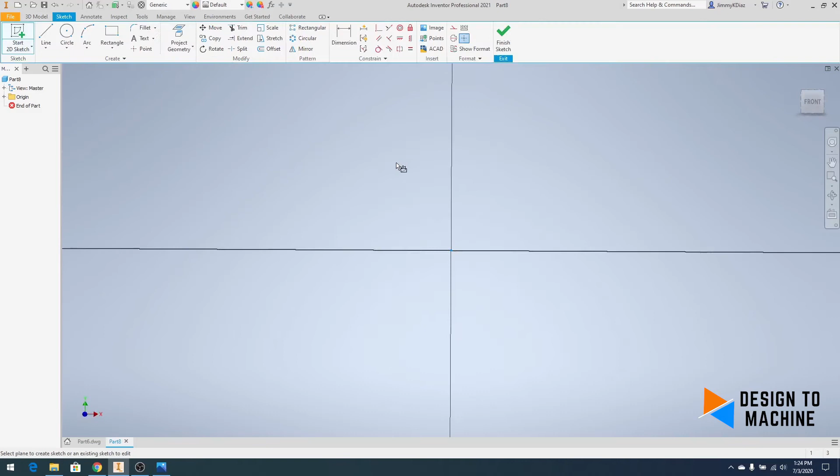Let's go ahead and start a new folder or a new window, and it's going to be metric. We're going to go ahead and get started on a 2D sketch on the XY plane, on the front view. Start with the rectangle, and it's going to be 85 millimeter. Hit your tab on your keyboard, by 62.

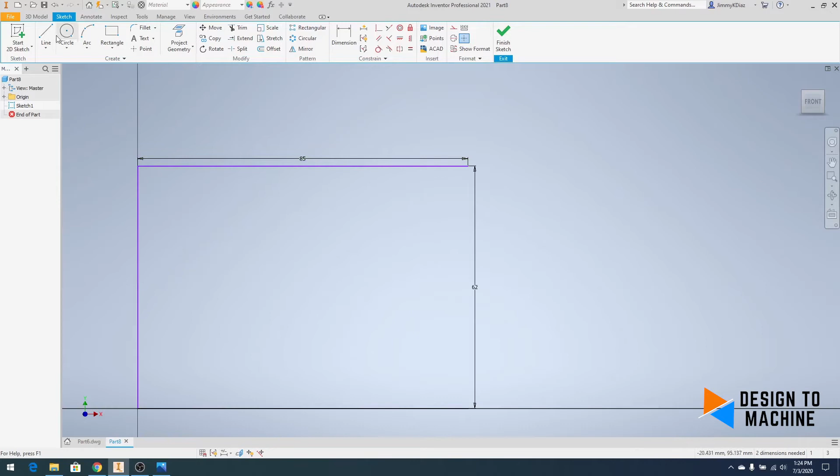Right click OK. Go ahead and delete the back line, and we're going to sketch the back part of it. It's going to be 12 millimeter down, 7 millimeter to the left, 38 millimeter straight down, back over 7, and then down to 12.

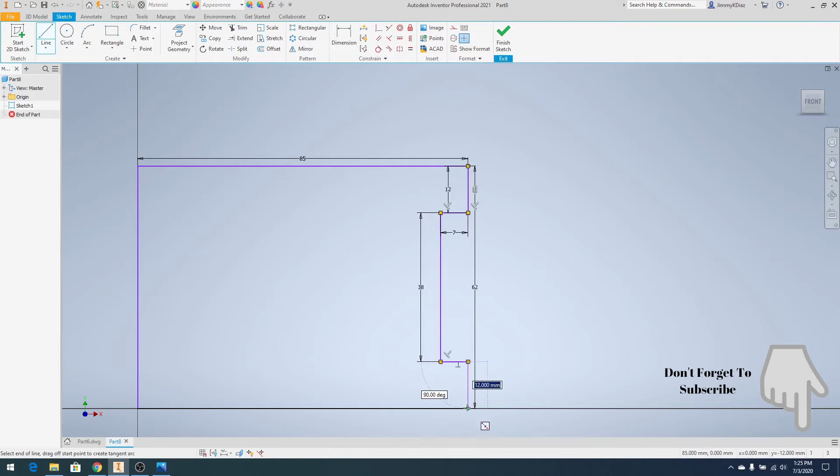We'll go ahead and create another rectangle inside this one, and it's going to be 66 millimeter. Hit your tab key, by 57. Right click OK. Let's position this, it's going to be 2.5 millimeter. Right click OK.

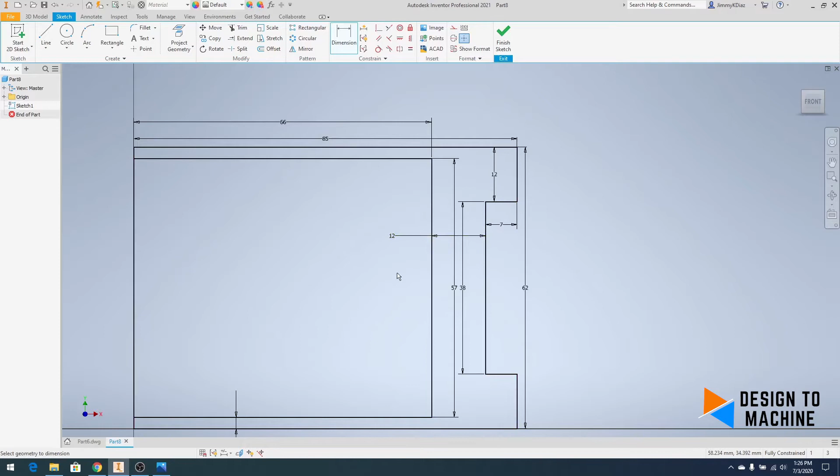Let's make sure that this is 12. Perfect. Finish sketch. We're going to extrude this face in both directions.

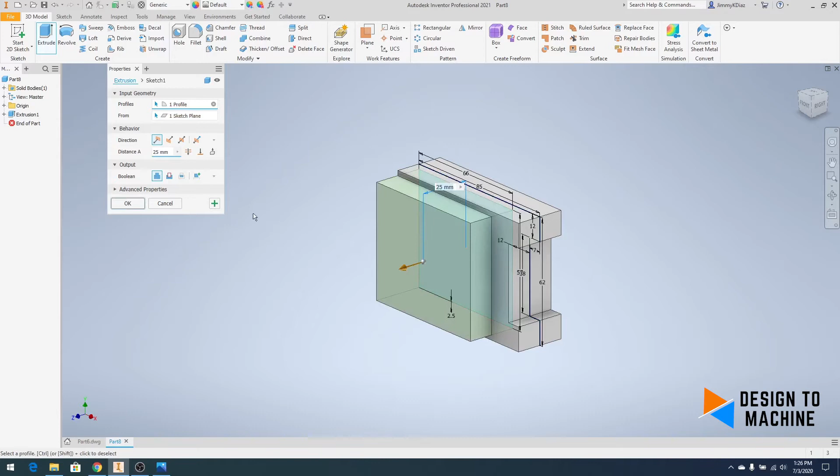It's going to be 25 millimeter. Hit your plus to apply and create new extrusion. We're going to extrude the center portion in both directions. It's going to be 15 millimeter, and you can hit enter.

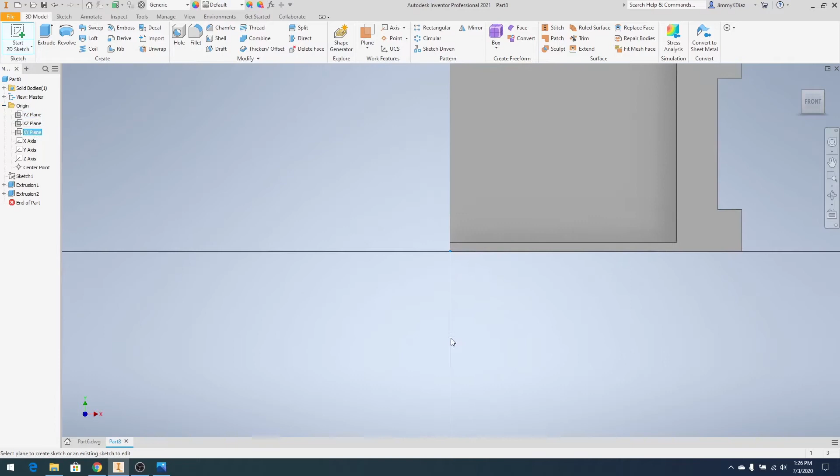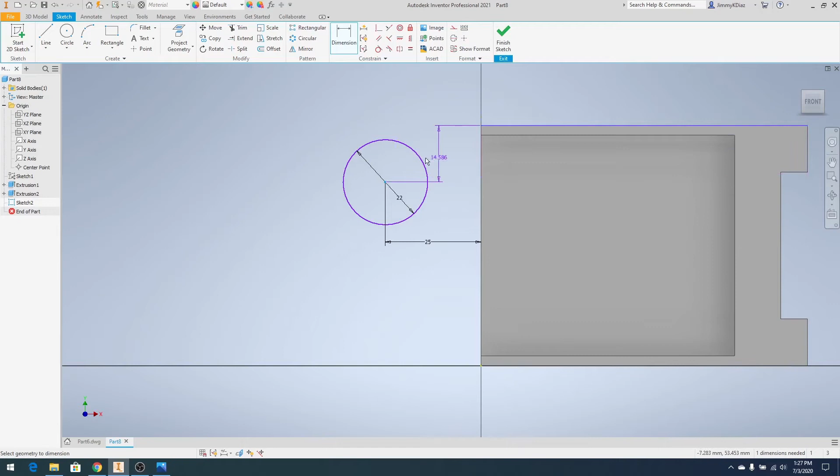So we're going to create another sketch on the XY plane, the origin, XY plane. We're going to start off with a circle that is 22 millimeter. Let's go ahead and position this here to here, 25 millimeter. And from here to here, it's going to be 22 millimeter. Right click OK. Create another circle, it's going to be 44 millimeter. Right click OK.

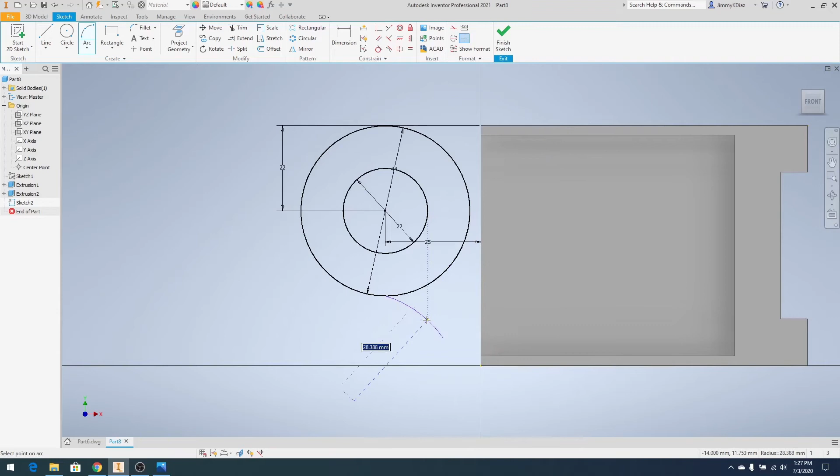Now let's go ahead and do some arcs. The bottom, somewhere right around this area, it's going to be 18 millimeter arc. And then there's going to be another one right here that's going to be a 9 millimeter arc.

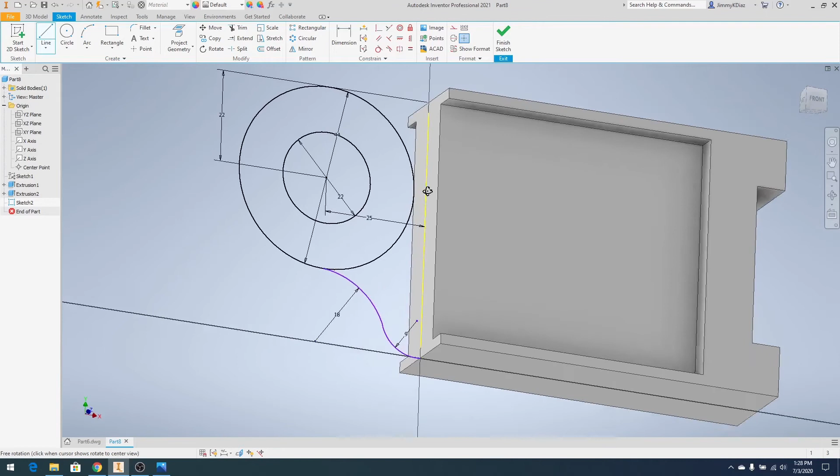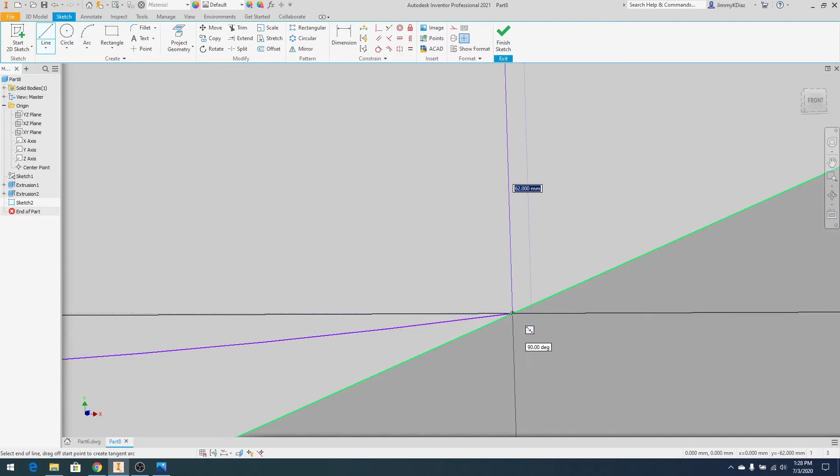Right click OK. Create a line so we can extrude this feature from here to here. And also we're going to go straight down to close the loop. Just like that. Right click OK.

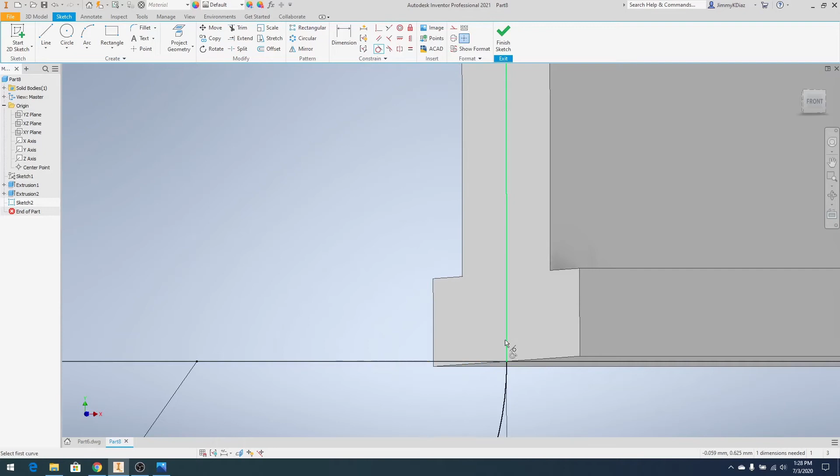So let's go ahead and constrain these arcs, make sure that they're tangent to one another. Well, go back one. Okay, tangent from here.

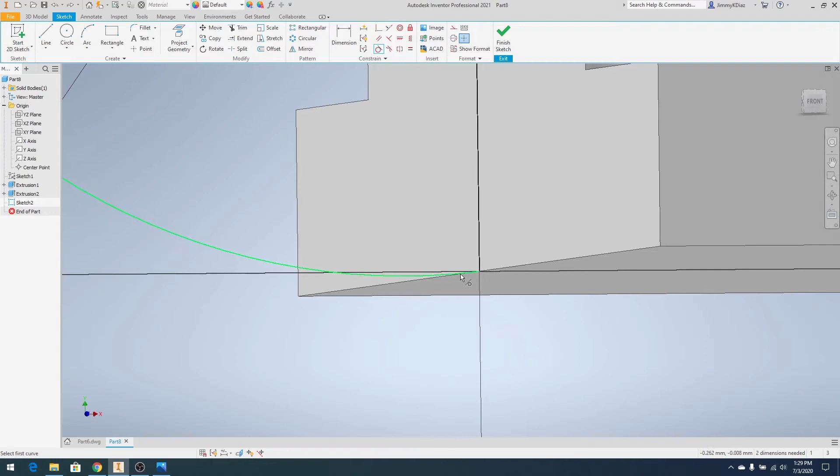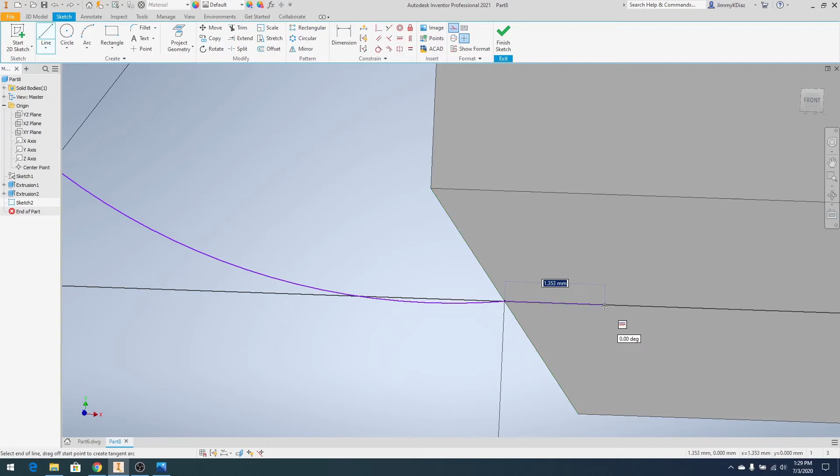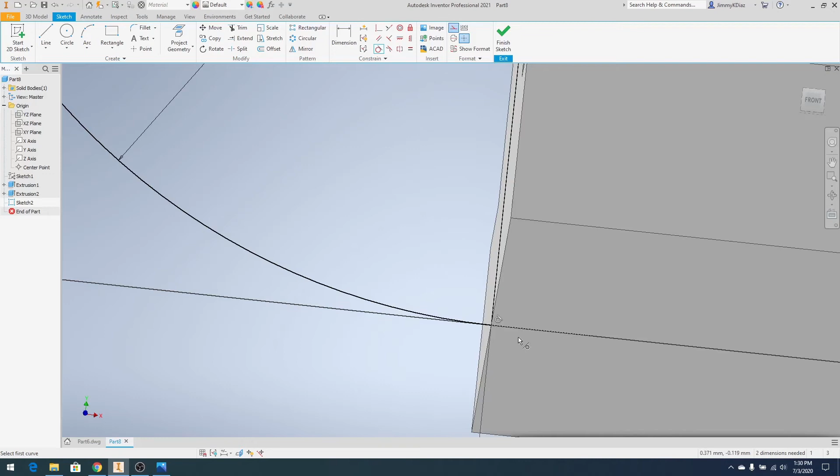Okay, let's create a line, and it's going to be a construction line. It doesn't have to be anything too fancy, just like that. And we're going to constrain that. There we go, perfect. See what I just did there? All I did was create a line, make sure it's a construction line, started at the origin, moved it over - it was over 1 millimeter. It doesn't have to be but a half a millimeter. It's just a construction line to make sure that these are tangent to one another.

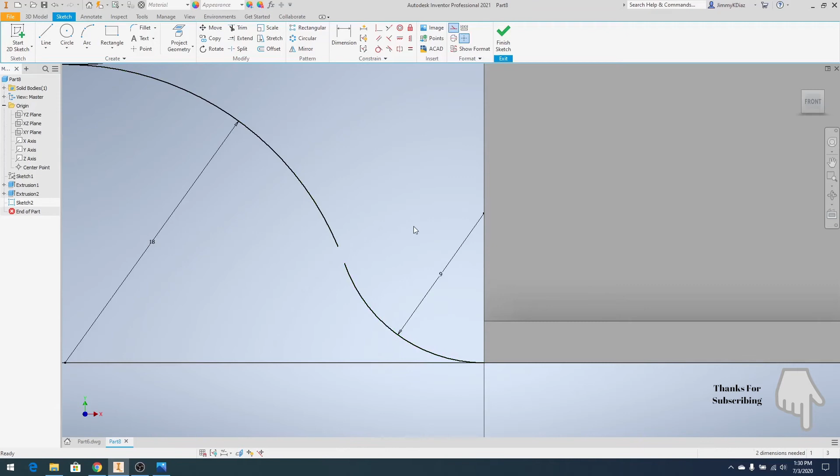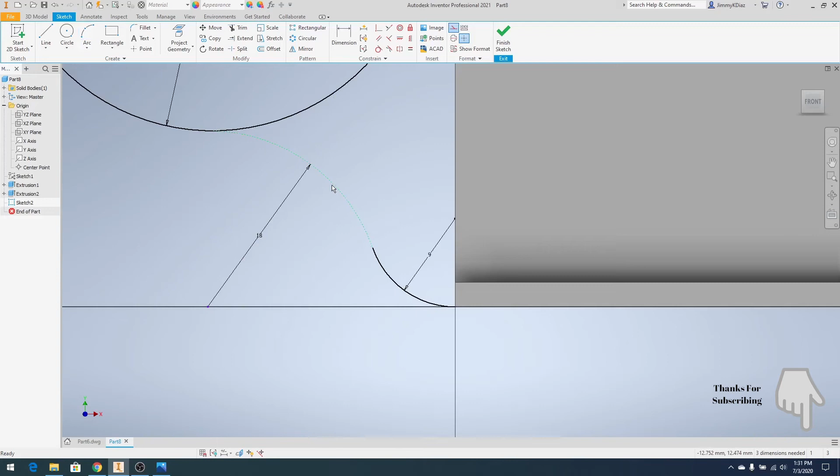Okay, go back to front. Let's go ahead and close this loop here, make sure that they're tangent. Let's go ahead and just make a new arc here from here to here. Okay, and this was 18 millimeter. Okay, I still have the construction line active, so all we need to do is make sure that these are constrained to be tangent to one another, just like that. Perfect.

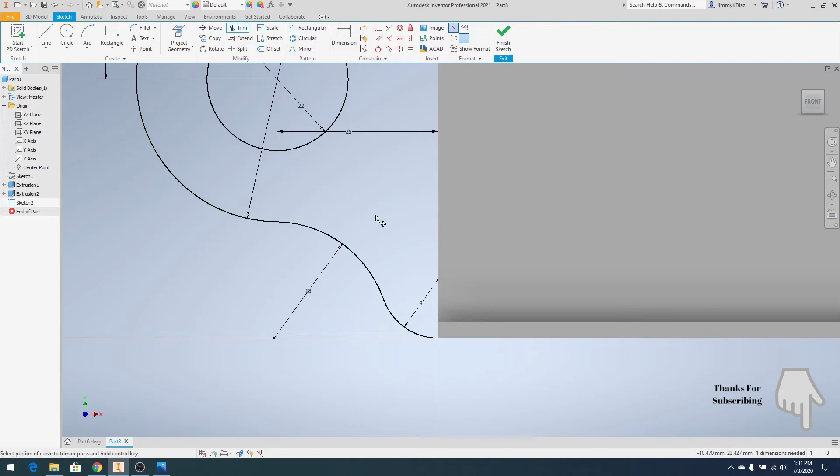Perfect, perfect. Trim this circle. Okay, so that is all sketched up, and it's all constrained, it's all tangent to one another with all these arcs. Perfect. So we have to create this feature here.

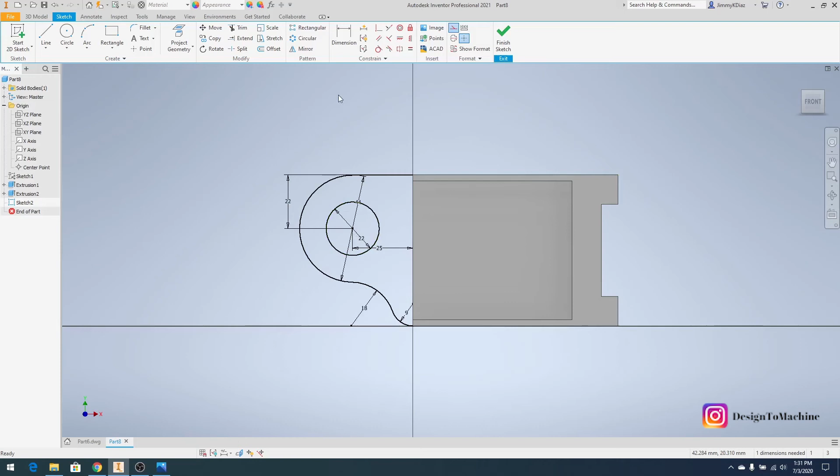Okay, while we're still in the XY plane, we're going to go ahead and just splice it down the middle and create some circles here that are 6 millimeter. Okay, turn that off. Create another circle that's 6 millimeter. Right click OK.

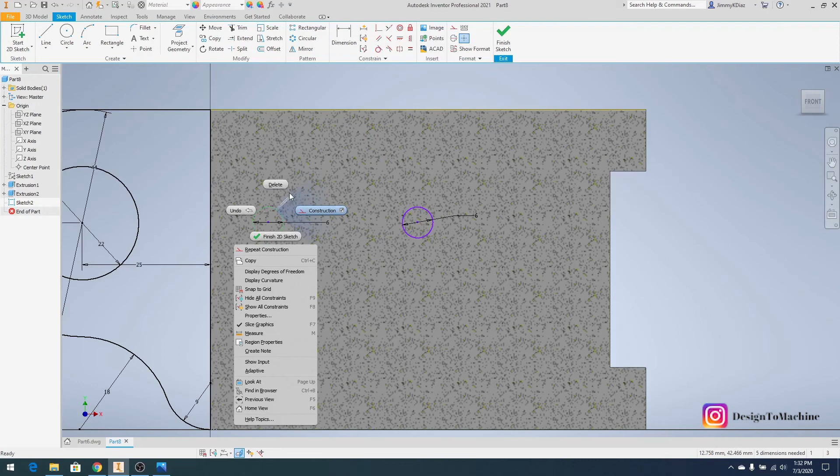Perfect, we're going to go ahead and close the loop. That's already tangent, and that's tangent. So let's just make sure that these two over here are tangent. Perfect. So hit F8, all 4 of these are tangent. Hit F9 to hide.

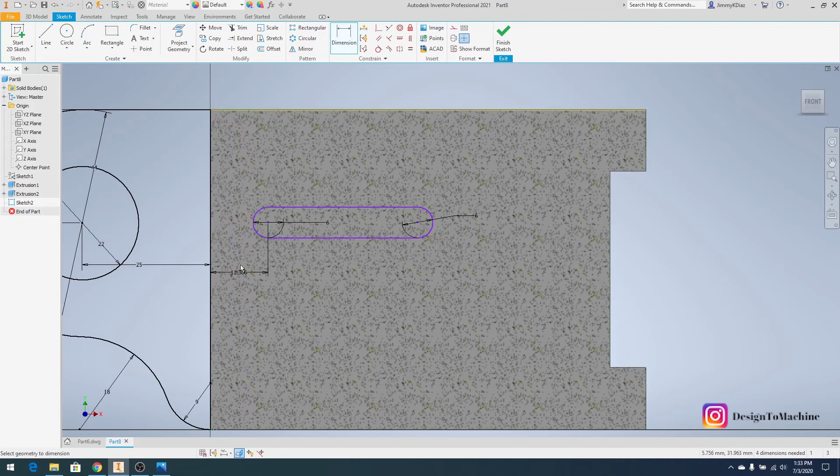Let's go ahead and trim there. Let's go ahead and dimension from here to here, that's going to be 22 millimeter. And dimension this line, which is 18 millimeter. Just like that, perfect.

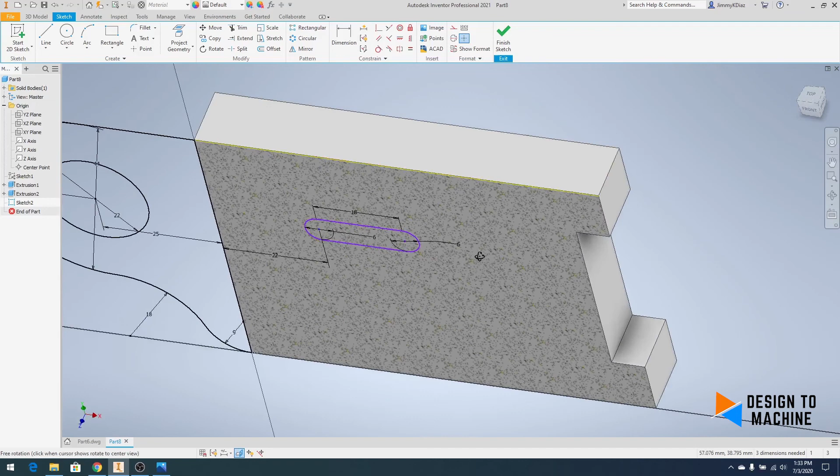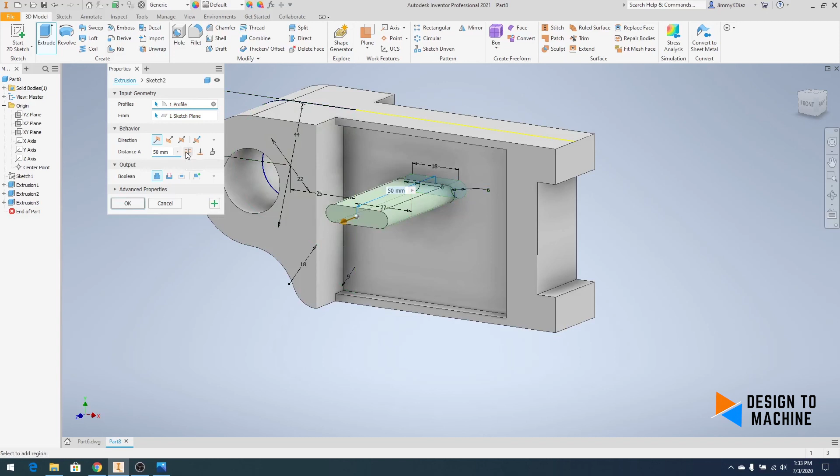Now we can finish the sketch and extrude this face both directions, 50 millimeter. Hit apply. We're going to extrude this feature, and we're going to make a cut in both directions, and hit apply or OK. And there you go, easy.

Pretty simple part. It's all about the basics right now. Then we'll move on to more complicated parts.

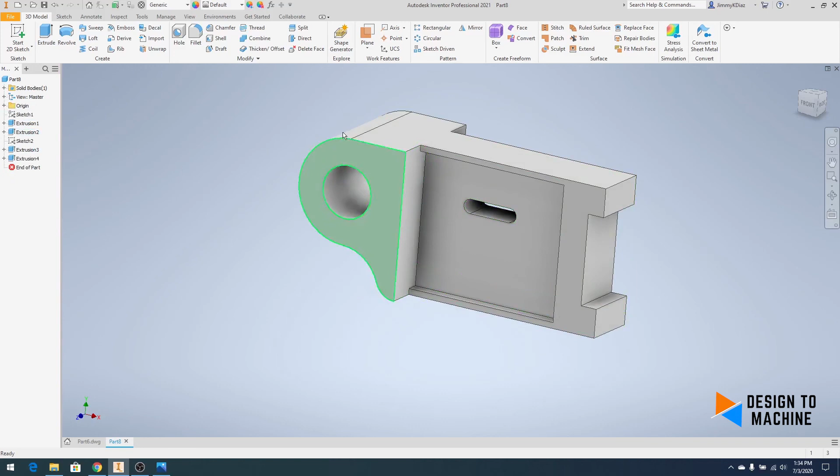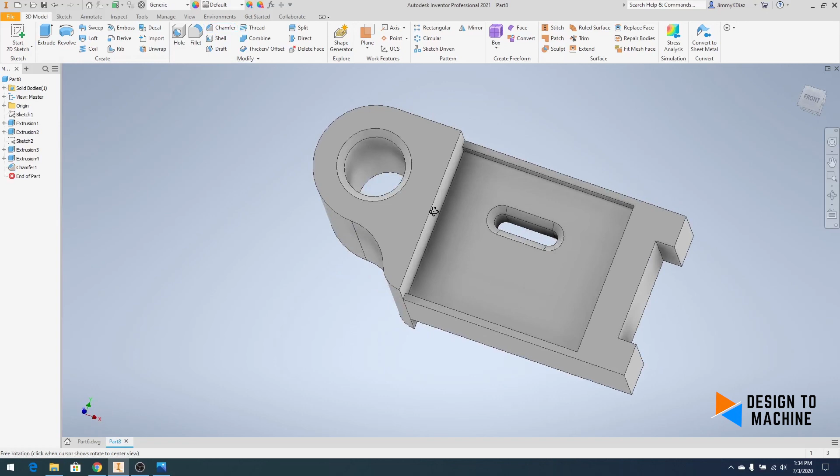Let's go ahead and chamfer 2.5, this through hole, and this through feature. Hit apply, cancel. Perfect.